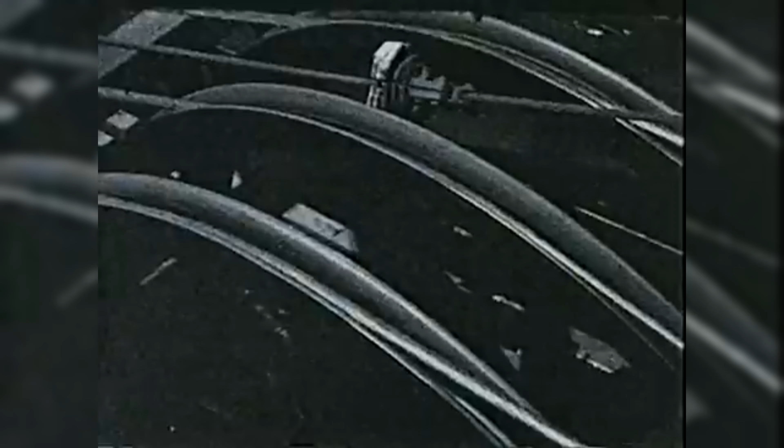While ships went down in the Pacific, while tanks burned in the African desert, while sirens screamed over London, in one American city, in one set of factory buildings, machine after machine rolled off the floor with a precision no war had ever demanded before.

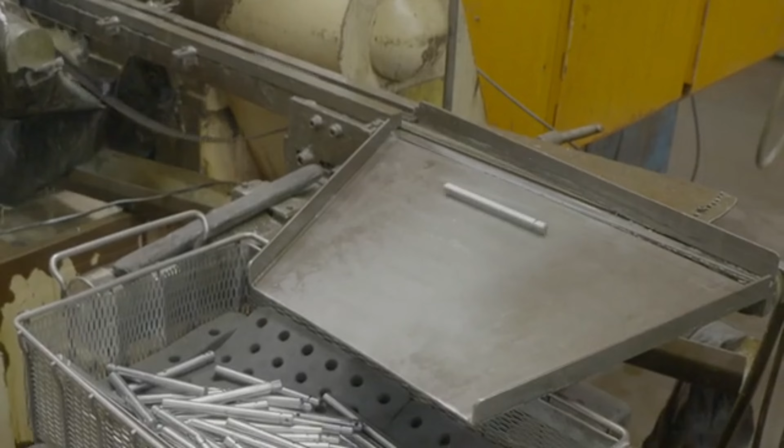In 1942, 1 out of every 12 machine tools manufactured in the United States carried the same name. 1 in 12. Not Ford, not General Electric, a company most Americans had never heard of, in a city whose greatest contribution to the war effort was invisible, ground into pistons, bored into gun barrels, pressed into the bearings that kept a democracy's engines turning.

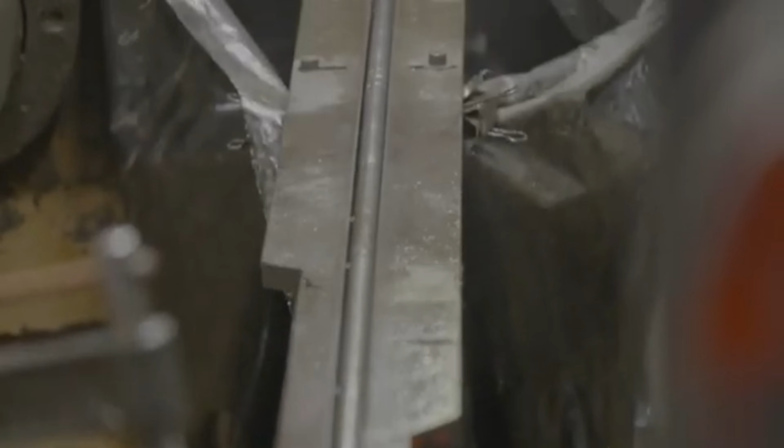What does it mean to win a war with machine tools? What does it mean when one city, one factory, one family decides, not on a battlefield, but in Ohio, the outcome of the greatest conflict in human history? This is the story of Cincinnati grinders. It begins, as so many American industrial stories do, with an inheritance and the right friendship.

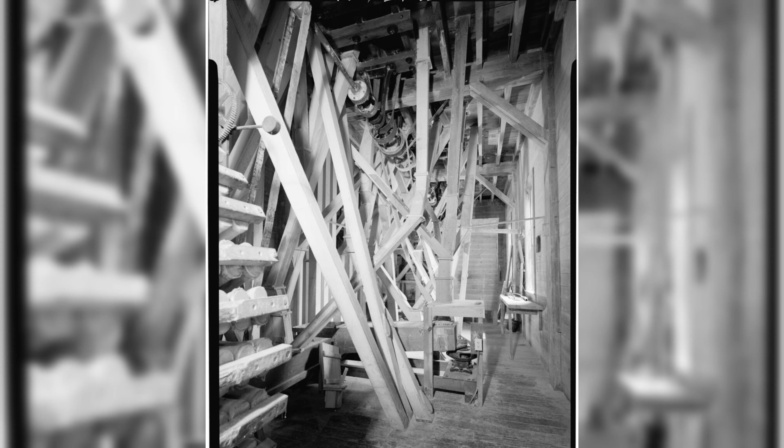In 1874, a young man named George Mueller inherited his father's modest machine shop on Vine Street in Cincinnati, Ohio. The elder Mueller had built a small reputation making parts for sewing machines and repairing whatever anyone brought through the door. George was practical enough to know he couldn't run it alone, and smart enough to ask his friend Fred Holz to join him. Holz was the kind of man who looked at a piece of metal and saw not a material, but a problem to be solved.

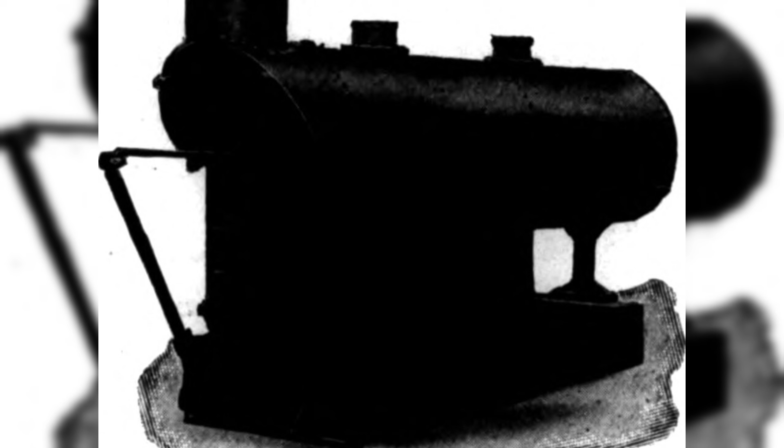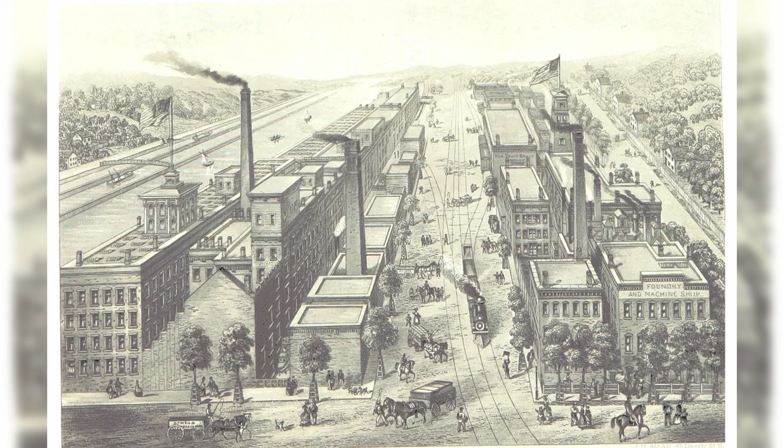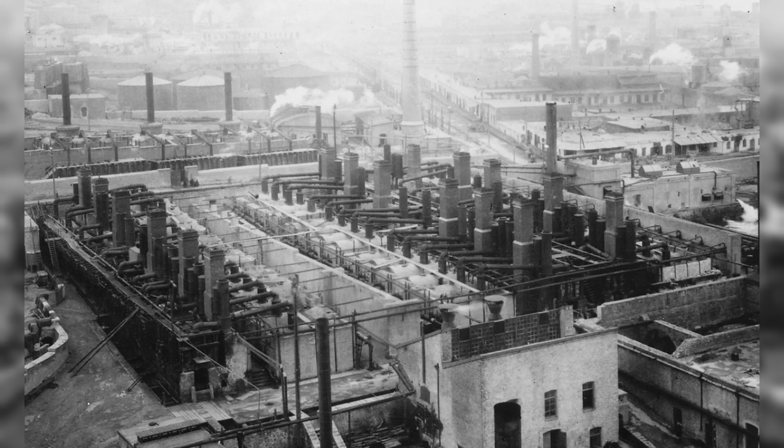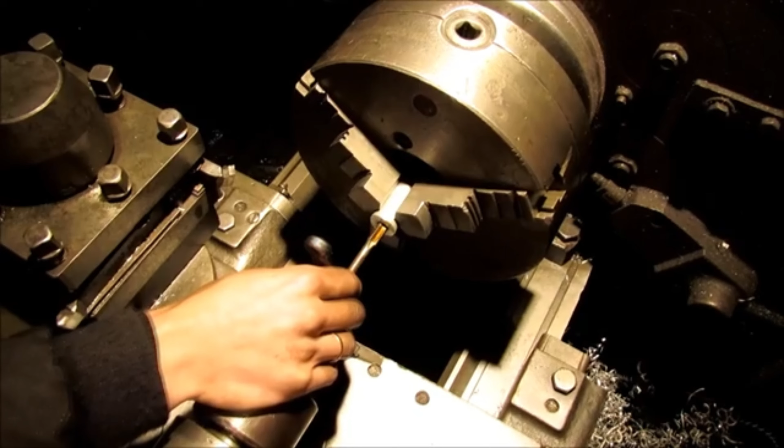For the first few years, they did what the shop had always done: repaired, maintained, turned parts on order. But by 1876, the two men had found their real direction. The expanding American economy needed fasteners, threads, and precision connectors at a scale that hand tools could never supply. Mueller and Holz reorganized around the screw machine and its related tooling, the taps and dies that cut threads into metal. By 1884, their enterprise was formally incorporated as the Cincinnati Screw and Tap Company. Not a glamorous name, but an accurate one.

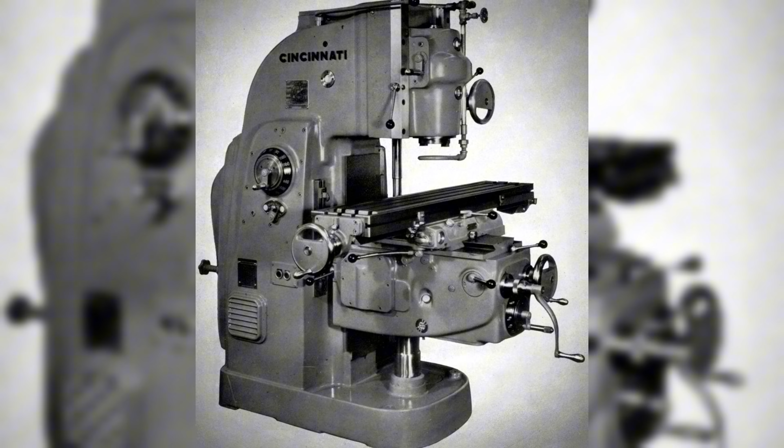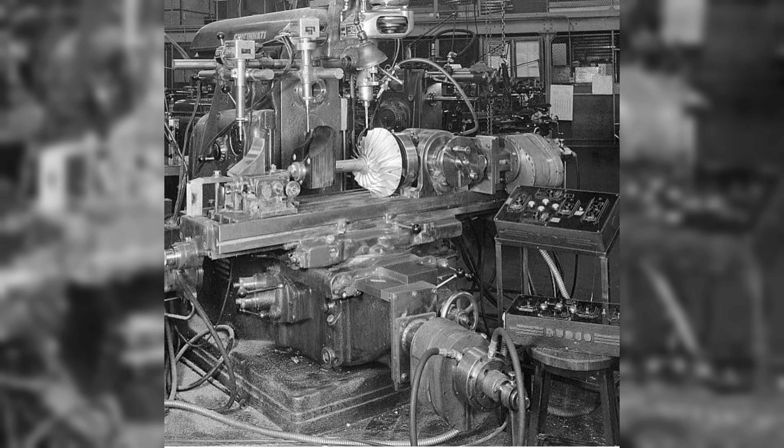The decisive break came in 1889, and it was not an economic decision, but an intellectual one. Fred Holz understood something that most manufacturers of the era did not: that the tools used to make tools were worth more than the tools themselves. In that year, he separated the milling machine work from the screw and tap business entirely, and, together with his financial partner Frederick A. Geier, incorporated the Cincinnati Milling Machine Company.

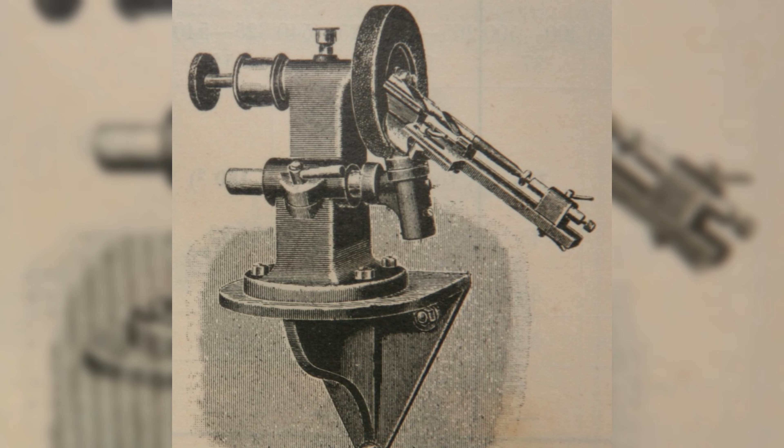In that same year, Holz designed the company's first cutter grinder, a machine that allowed factories to sharpen their own cutting tools in-house rather than buying new ones. The cost savings were immediate and obvious. The first export order, to a Swedish manufacturer, arrived the following year.

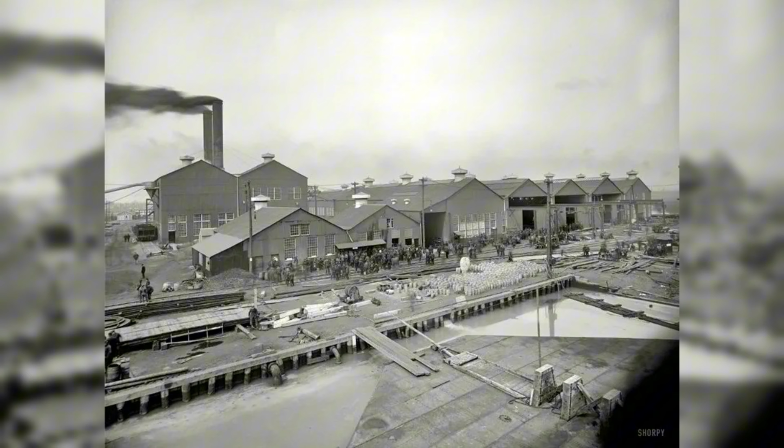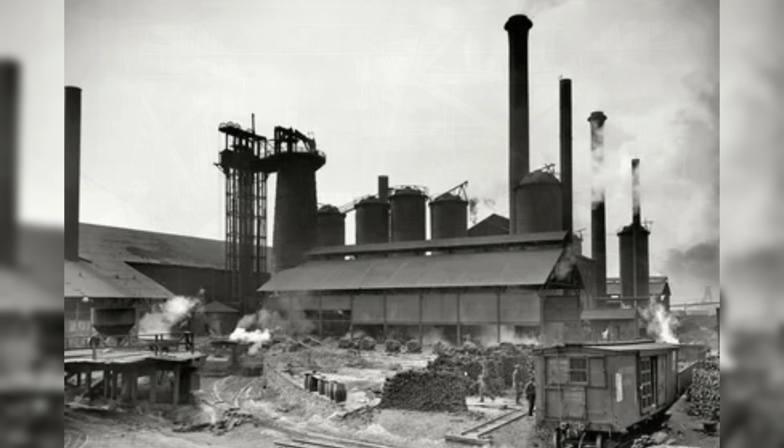Geier, who eventually bought out Holz's stake in 1905, was the organizational mind the company needed. He saw that the machine tool industry's center of gravity was shifting westward, and he was determined to be ahead of it. In 1907, he purchased 102 acres in the Oakley neighborhood east of Cincinnati, a site large enough to build not just a factory, but an industrial colony. By 1911, the new complex was complete: a foundry, a power plant, machining halls with over 6 acres of floor space. At the time, it was described as the world's largest factory devoted exclusively to milling machines.

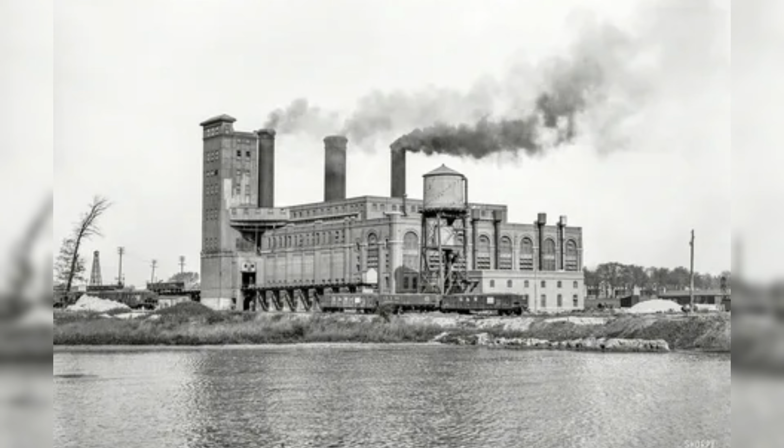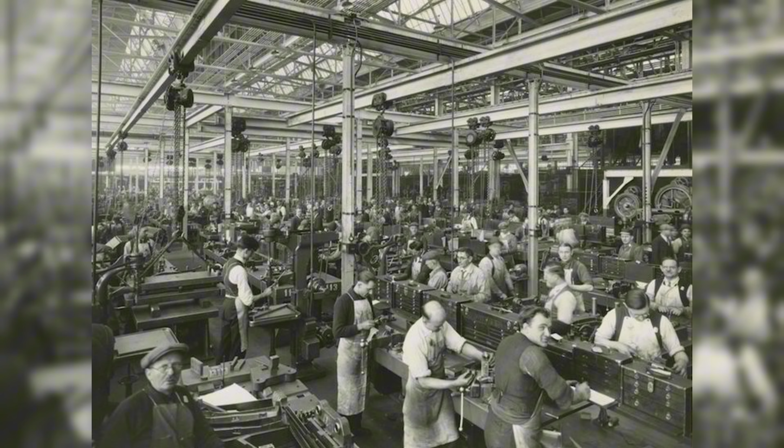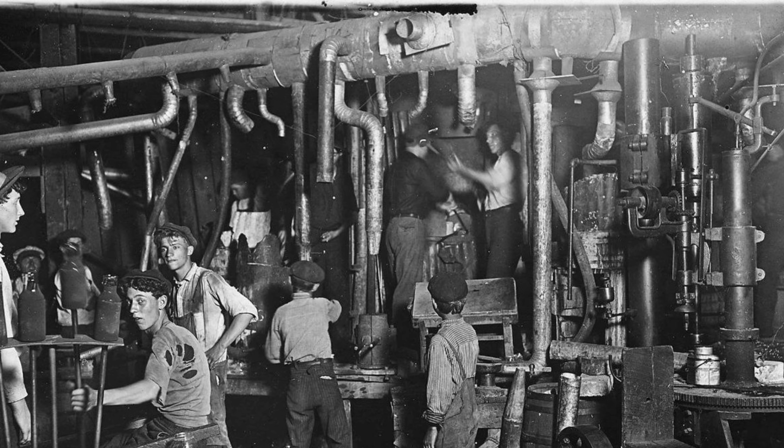Geier's timing was not luck. The automobile had arrived, and America's hunger for precision metal components was about to become insatiable. But the years immediately before the early 1920s brought a reckoning. By 1920, the company had 1,004 workers and 561 unsold machines sitting in inventory. The economic downturn forced brutal decisions. Management salaries were cut, wages reduced by 15%, and the workforce fell to just 250 by 1921.

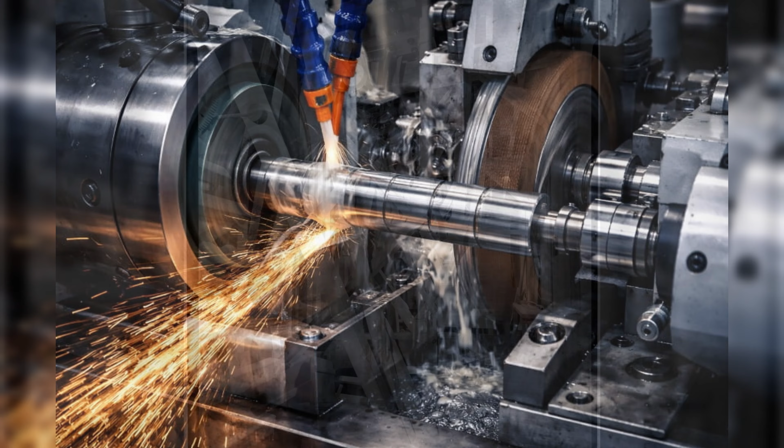It was in the middle of this contraction that a young man named Frederick V. Geier, the founder's son, recently returned from the Western Front, where he had personally fixed production problems on 75mm artillery pieces, walked into the boardroom and proposed something that would change the company's trajectory entirely. He proposed grinding. In September 1921, Cincinnati Milling Machine Company acquired a controlling interest in the Cincinnati Grinder Company.

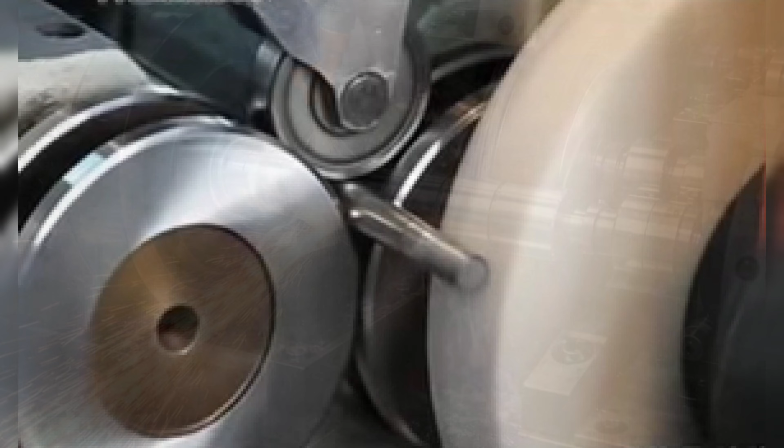The following year, production moved to Oakley. Along with the factory came something far more valuable: the patents on centerless grinding. What is centerless grinding, and why did it turn an entire industry upside down? The answer requires a moment with the physics.

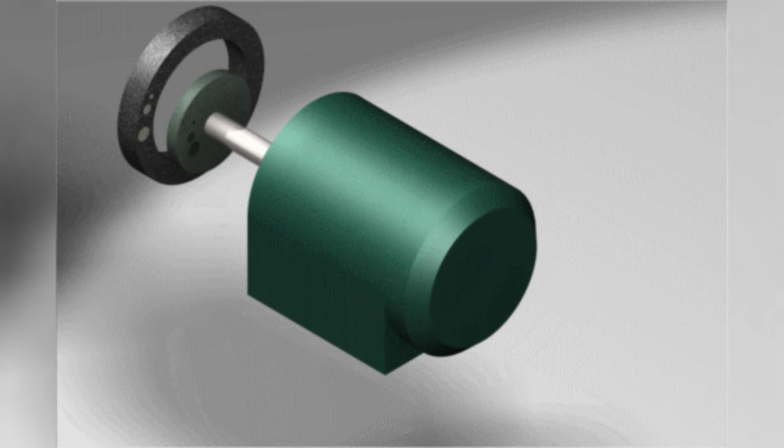In conventional cylindrical grinding, a workpiece, a shaft, a pin, a valve stem, is held between two centers, mounted, ground, removed, and replaced one piece at a time. The process is precise but slow. Every mounting introduces a small chance of error. Every removal costs time. Centerless grinding eliminates the centers entirely.

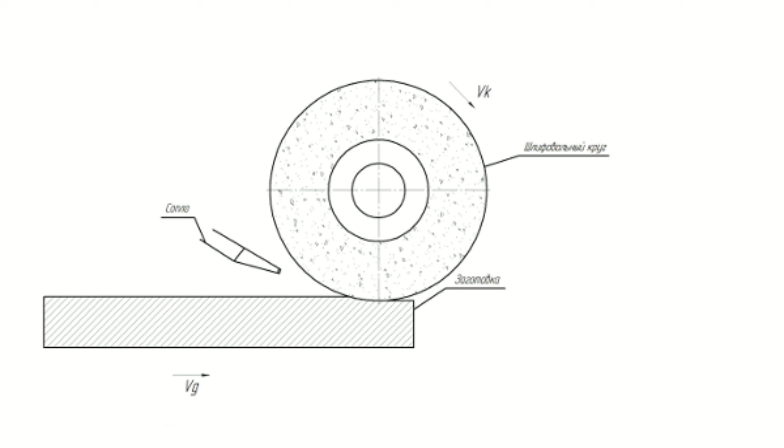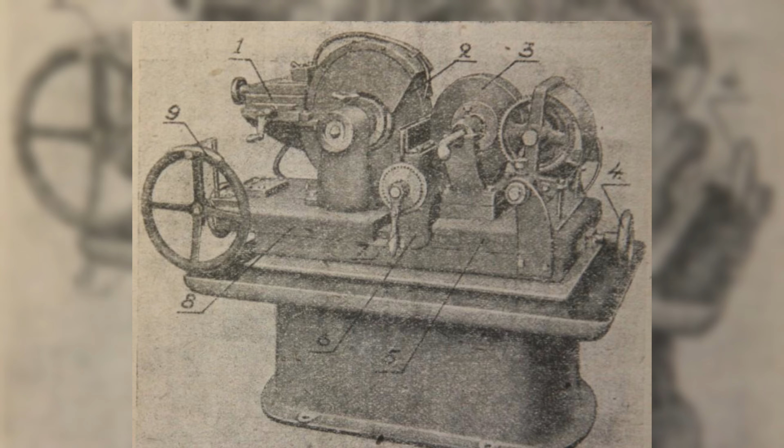The workpiece rests on a support blade between two rotating wheels, a large grinding wheel that removes material, and a smaller regulating wheel that controls the rotation and feed of the part. Tilt the regulating wheel at a slight angle, typically 1 to 3 degrees, and the workpiece feeds itself through the machine continuously, emerging from the other end ground to tolerance. No chucking, no centering, no stopping.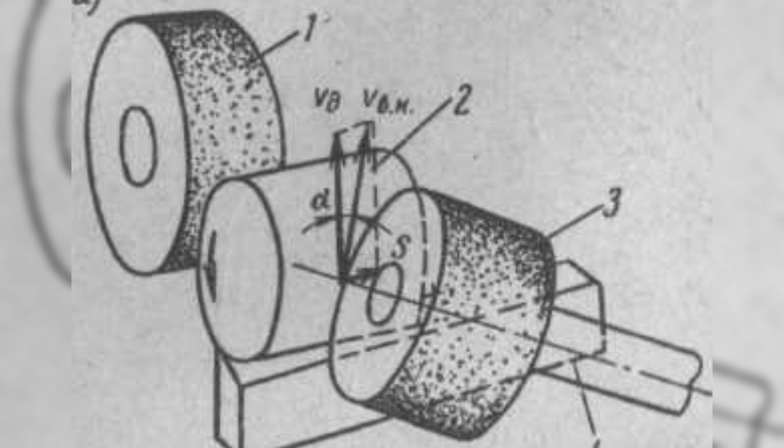A skilled operator could feed parts in a continuous stream. The machine would return them ground to within fractions of a thousandth of an inch. The implications for mass production were staggering. Pistons, valve stems, roller bearings, fuel injector pins, camshaft journals. Any cylindrical component produced in volume could now be ground faster, more consistently, and at lower cost than had ever been possible.

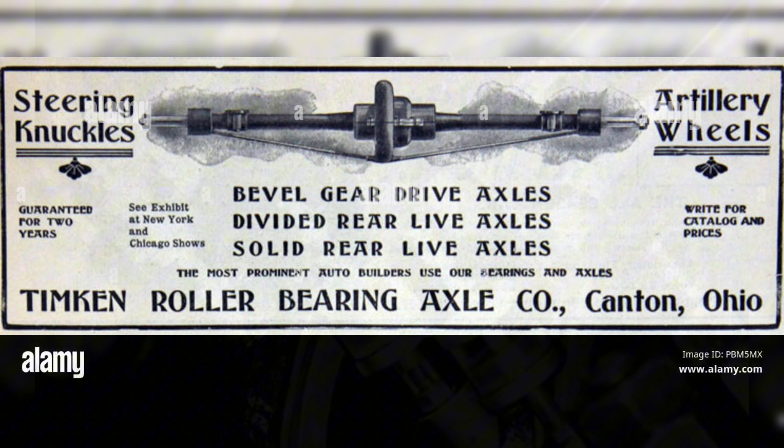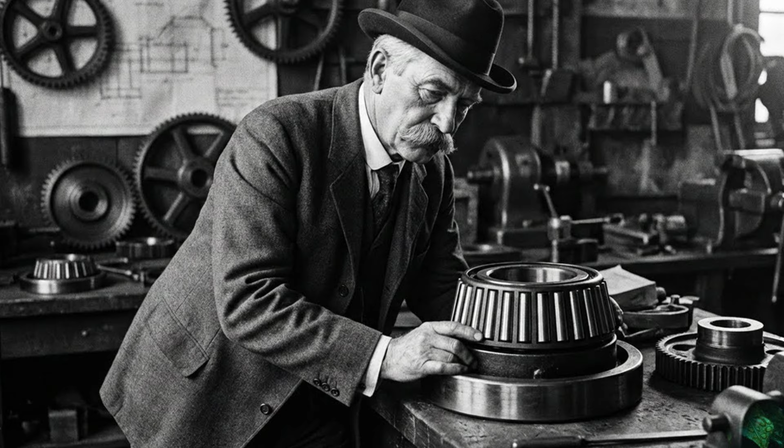The subsidiary, formally organized as Cincinnati Grinders, Inc., its trademark registered with the U.S. Patent Office in October 1929, moved quickly to perfect the technology in partnership with one of America's most demanding customers. That customer was the Timken Company, the Canton, Ohio bearing manufacturer whose roller bearings went into virtually every American automobile, locomotive, and piece of heavy equipment.

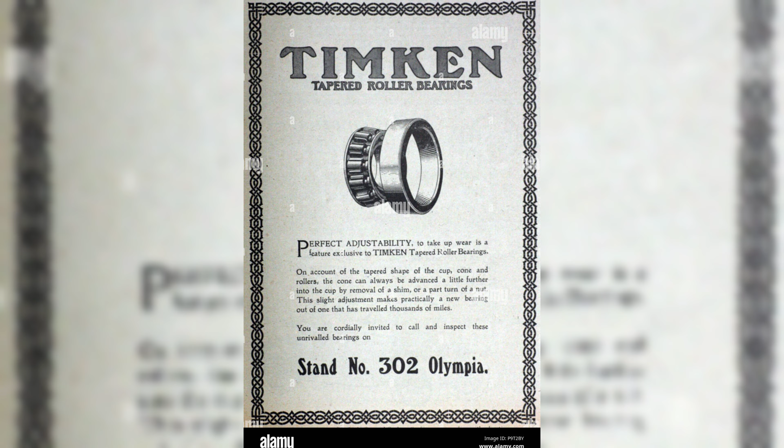Timken needed bearings that were simultaneously cheaper to produce and more precisely ground than anything the previous generation of machinery could deliver. Working with Cincinnati Grinders, they got both. The resulting machines allowed Timken to produce automotive bearings that were lower in cost and higher in precision than their predecessors. The automotive industry took notice immediately. Ford, General Motors, Chrysler, all of them depended on bearings, and all of them depended on the companies that ground them.

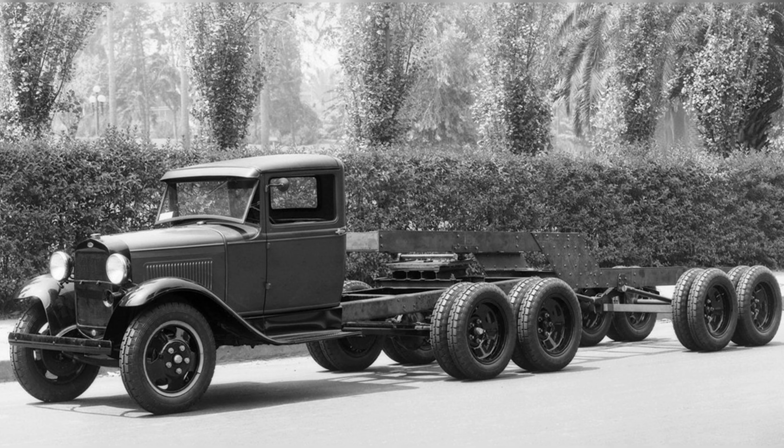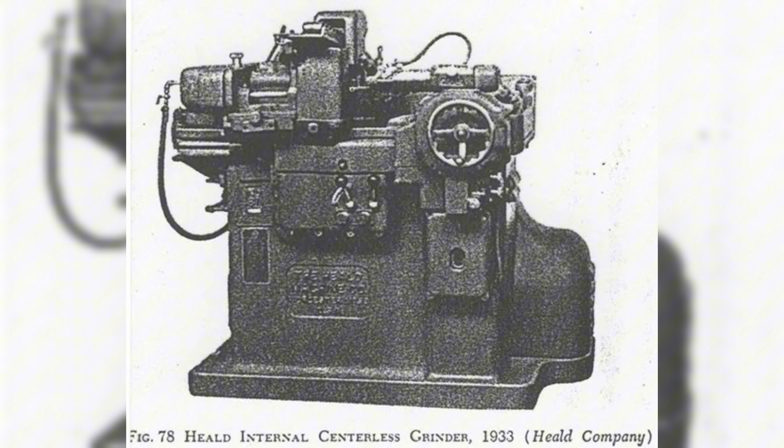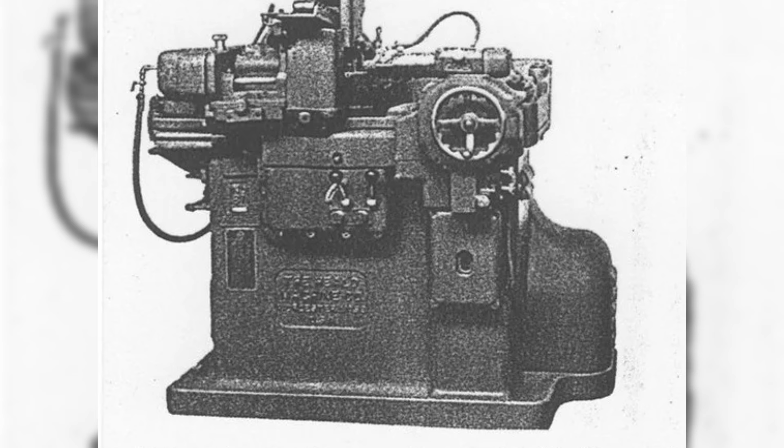By 1926, with the grinding subsidiary fully integrated and the centerless technology spreading across American industry, Cincinnati Milling Machine Company became the largest machine tool company in the United States. It had started 40 years earlier with 2 men in a rented shop fixing sewing machines. Now it set the standard by which every bearing, every piston, every precision shaft in American manufacturing was measured. The question in the years that followed was whether a company built on precision could survive an imprecise world.

December 7, 1941, Pearl Harbor. The question of whether America would enter the war was answered in an afternoon. The question of whether American industry could supply a war was answered over the following 18 months, and Cincinnati was at the center of the answer.

The mill, as employees had always called the Oakley complex, had survived the Great Depression by leaning on export sales. By 1932, exports represented a third of all revenue, up from 1/5 in 1929. The company had endured by selling precision to a world that needed it. Now the world needed it at a scale no peacetime economy had ever contemplated.

Fred Geier, the younger, reported a figure that is still quoted at the National World War II Museum in New Orleans. During the war, the mill produced a new machine tool every 17 minutes. In 1942 alone, 17,511 machines came out of the Oakley plant. 1 in every 12 machine tools manufactured anywhere in the United States that year bore the Cincinnati name.

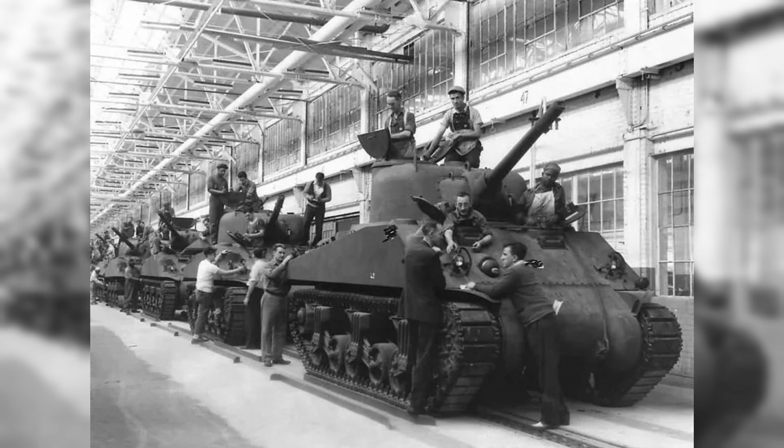To sustain that output, the company assembled a network of 150 subcontractors spread across the eastern third of the nation. 27 outside foundries shipped castings to Oakley around the clock. The workforce, which had stood at just 250 in the depths of the 1921 contraction, climbed to a wartime peak of 8,561 employees. What did those machines make?

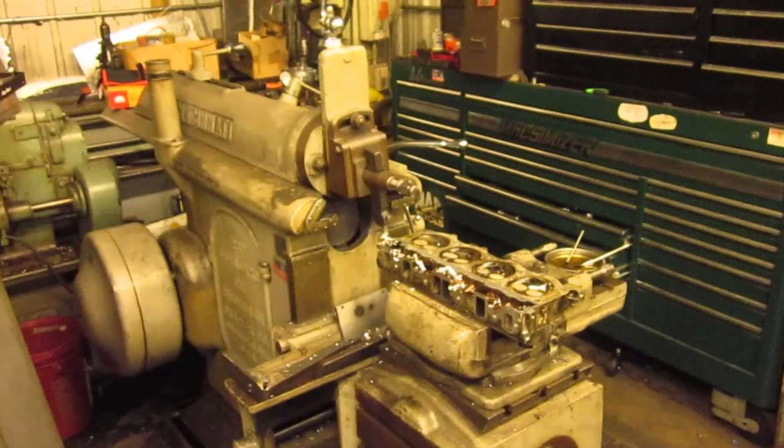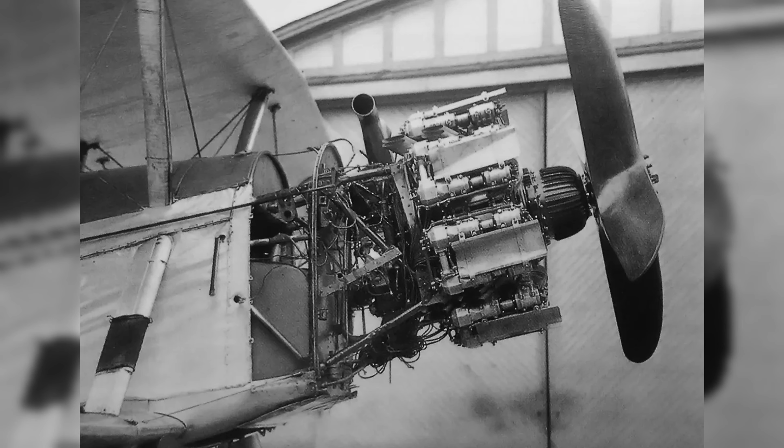Everything a modern mechanized army required. Cincinnati's milling machines cut the fins on aluminum cylinder heads for air-cooled aircraft engines, a problem the mill's own engineers solved when the fins proved too thick for adequate cooling. The grinding machines produced the precision surfaces on artillery components, on naval gun barrels, on the roller bearings that went into every tank, every aircraft, every ship in the Allied inventory.

Late in the war, the Oakley plant itself produced artillery fuse setters, tractor parts, and dies for ammunition manufacturing. The company had ceased to be merely a machine tool builder and had become a direct component of the arsenal.

The lessons of those years went beyond production numbers. The mill learned, at a scale and pace it had never experienced, that precision manufacturing was not a luxury but a strategic asset, that a tolerance of 1/10,000th of an inch on a bearing race could determine whether an engine held together at altitude, whether a gun fired when its crew needed it to. That lesson would shape the company's identity for the next 2 decades.

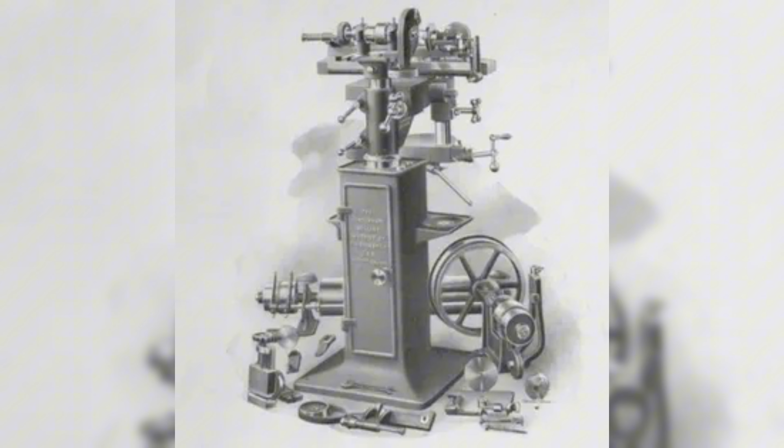The post-war decades were Cincinnati's fullest expression of what a precision machine tool company could be. The automotive industry was consuming bearings, pistons, and valve trains at a pace that made wartime production numbers look modest. New housing meant new appliances. New appliances meant new motors. New motors meant new bearings. The aerospace industry, growing from wartime roots into the jet age, demanded components ground to tolerances measured in millionths of an inch. Every one of those requirements fed demand for the machines that Cincinnati built.

The machines themselves became legendary in the trade. The Cincinnati monoset, a precision tool and cutter grinder introduced in the post-war era, became the standard against which all other tool grinders were measured. The number 2 tool and cutter grinder, with its characteristic green paint and the Cincinnati name cast into the side of the column, appeared in virtually every serious machine shop in the country.

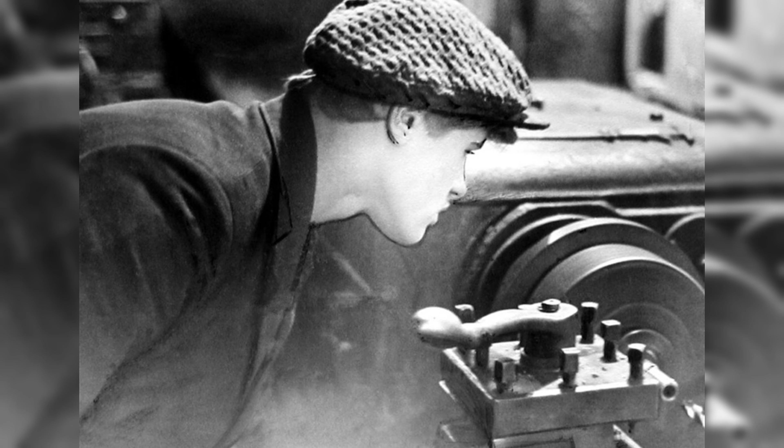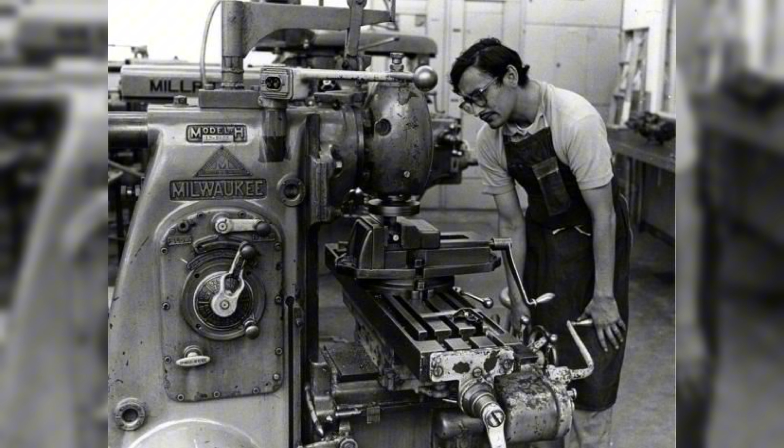Machinists who trained in the 1950s and 1960s learned their trade on Cincinnati equipment. Men who spent entire careers in precision manufacturing remember the feel of those hand wheels and the reliability of those spindle bearings with the kind of specificity that suggests something more than nostalgia.

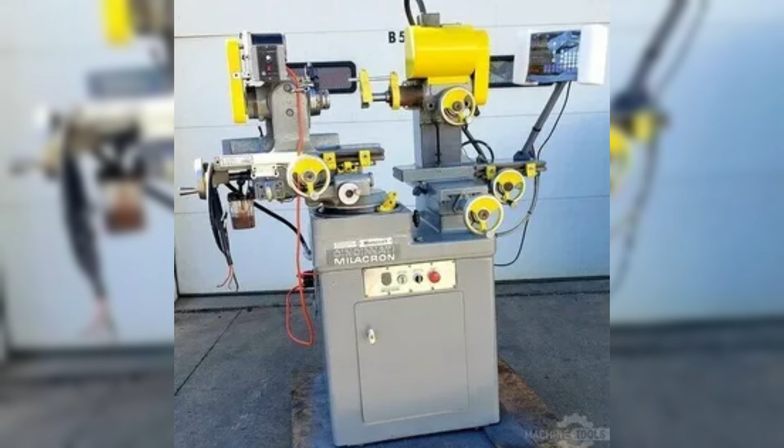On the secondary market in 2024, a number 2 MT tool and cutter grinder in working condition sells for between $2,450 and $9,450, prices that reflect not antique sentimentality but genuine production utility. These machines were built to last, and they have.

From the 1930s through the 1960s, Cincinnati maintained its position as the world's largest machine tool manufacturer. The Oakley complex covered multiple city blocks. Every family in the neighborhood had someone who worked there. The company sponsored Boy Scout troops, donated machine tools to the public high school's metalworking shop, and provided equipment to the continuing education programs at what would later become the University of Cincinnati.

In a city that had built its identity on pork packing and beer brewing, Cincinnati milling had created something new, a culture of precision, a civic identity rooted in the making of things that had to be exactly right. It could not last forever. Nothing in American manufacturing did. The threat came slowly, then all at once.

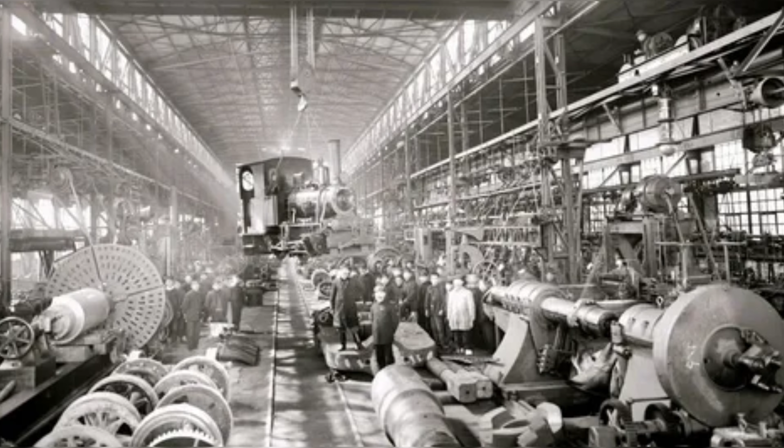Japanese machine tool manufacturers had been rebuilding since 1945, first with American assistance, then with increasing independence. By the late 1960s, companies like Okuma, Mazak, and Mori Seiki were producing machine tools that matched American quality at significantly lower prices. In the 1970s, as the dollar strengthened and American labor costs continued to climb, the price differential became impossible to ignore. Taiwanese manufacturers followed, targeting the mid-market with machines that were good enough for many applications at a fraction of the cost.

The numbers tell the story without mercy. In the early 1960s, American machine tool manufacturers controlled roughly 25% of the global market. By 1978, the U.S. share had fallen to around 20%. By the mid-1980s, it had dropped below 10%. Imports, which had been a negligible factor in 1960, captured nearly half the American machine tool market by 1986.

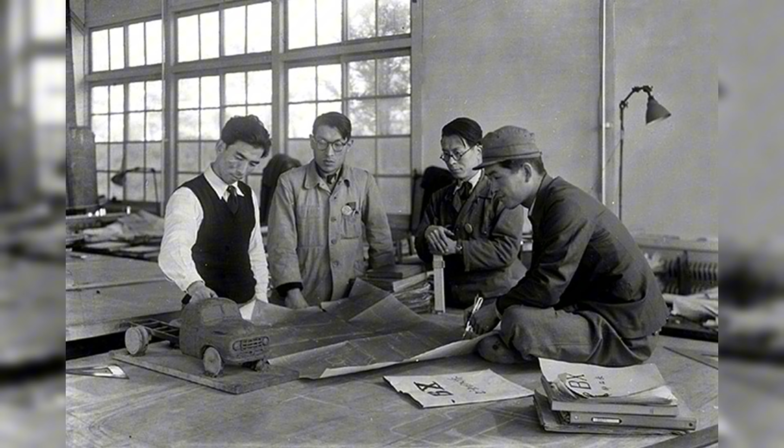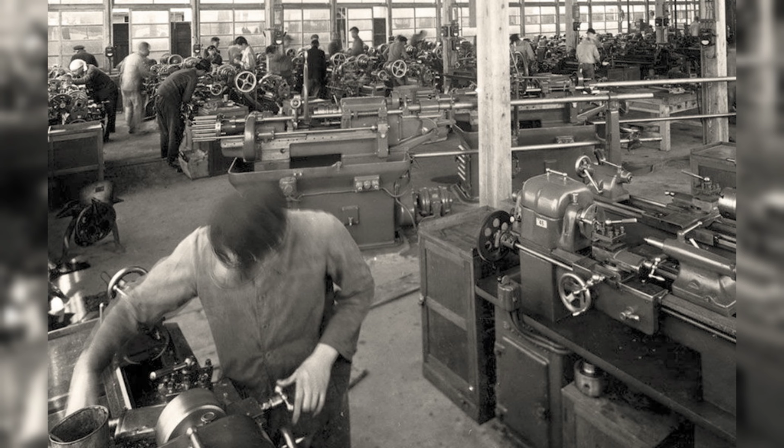Companies that had defined American manufacturing precision for a century found themselves competing on price with manufacturers whose workers earned a fraction of the Ohio wage. Washington noticed, eventually. In 1986, the Reagan administration negotiated a voluntary restraint agreement with Japan, limiting Japanese machine tool imports to specific annual quantities. The agreement was a political gesture as much as an economic policy.

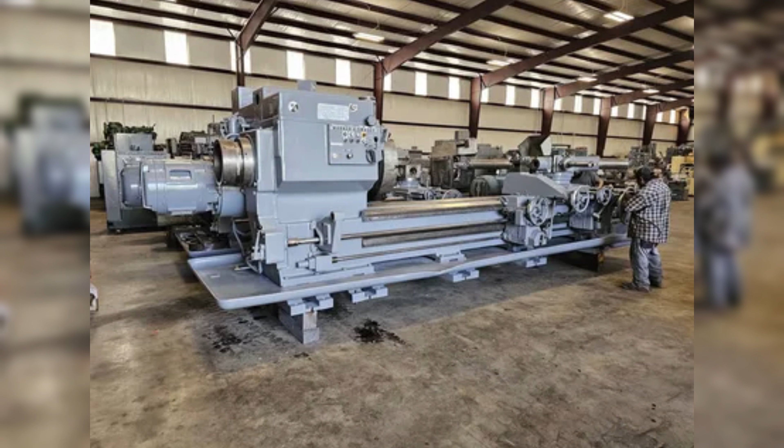It slowed the bleeding without stopping it. Tariffs and quotas could not address the fundamental restructuring of global manufacturing economics that was already underway. The casualties were severe. Kearney and Trecker, the Milwaukee machine tool builder that had been one of Cincinnati's great peers, was absorbed and eventually disappeared. Warner and Swasey, LeBlond, Brown and Sharpe's machine tool operations, the names that had defined American machining for a century, were sold, consolidated, or closed.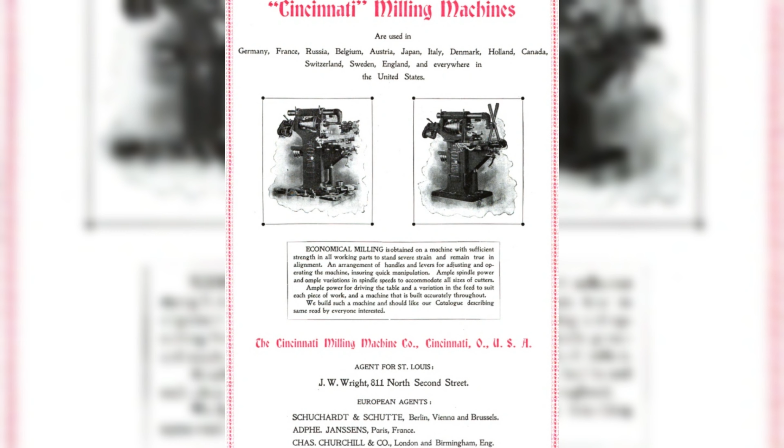Machine tool industry employment in the United States fell by more than 40% between 1980 and 1987. In Cincinnati, the Oakley plant began to look less like an empire and more like a monument to an era that was ending. The question was whether the mill had the will to fight, or whether it would simply wait to be acquired. Cincinnati's response to the competitive crisis began with a symbolic act.

In 1970, the Cincinnati Milling Machine Company reincorporated itself as Cincinnati Milacron, Inc. The name change was not mere marketing. It signaled a deliberate decision to stop defining the company by what it had always made and to define it instead by what precision manufacturing could become. The strategic pivot had two dimensions. The first was rationalization, cutting costs, consolidating facilities, focusing the machine tool business on segments where Cincinnati's engineering depth gave it an advantage over lower-cost competitors.

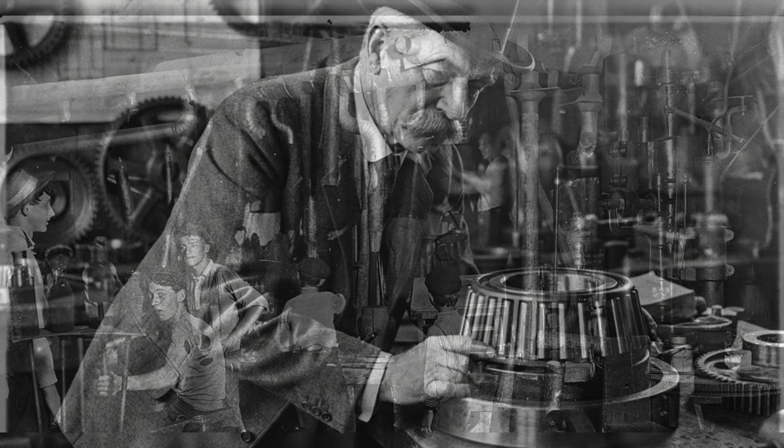In 1993, excess capacity forced the consolidation of machine tool operations. The second, more consequential dimension was diversification into plastics processing equipment, a market adjacent to metalworking in its precision requirements but insulated from the direct price competition of Japanese imports. The internal transformation came through a program called Project Wolfpack, launched in 1986 in the plastics division and later applied across the company. Cross-functional teams, engineers, production workers, salespeople, and accountants working together rather than in sequence were charged with a specific mandate: improve machine quality while removing 40% of the cost and 40% of the components.

According to reporting from the Cincinnati Enquirer in April 1992, the Wolfpack approach fundamentally changed how the company thought about product development. More than 75% of the mill's 1993 machinery sales consisted of products that had not existed 5 years earlier. It worked. After reporting losses in 5 of the 10 years following the peak of the Japanese competitive onslaught, Milacron returned to profitability in 1992. Its plastics machinery plants in Ohio were named among the 10 best plants in America by Industry Week magazine in October 1994. By 1995, nearly half of the company's revenue came from outside the United States.

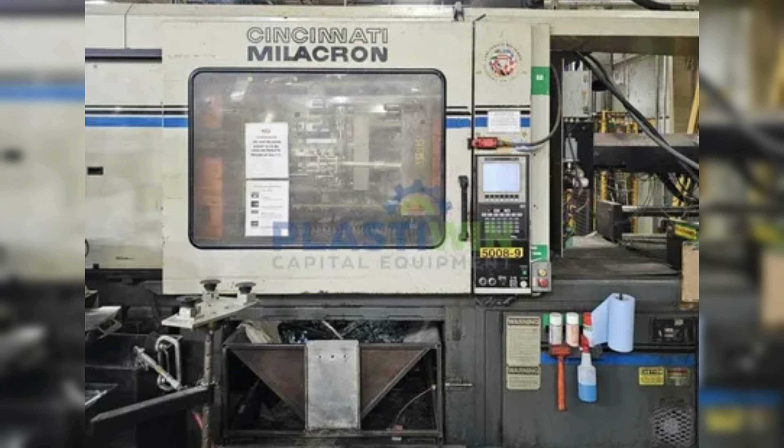What separated Cincinnati Milacron from the machine tool companies that died was not luck. It was the recognition, made painful and early, that the old identity, America's machine tool king, was no longer sufficient. The companies that clung to that identity found it a shroud. The companies that let it go and built something new while preserving what had always been genuine, the engineering culture, the manufacturing precision, the institutional knowledge accumulated over a century, had a chance. Cincinnati had a chance. Whether it used it wisely is a different question.

The decision that effectively ended the Cincinnati Grinders story came in 1998, when Cincinnati Milacron divested its machine tool division entirely and simplified its name to Milacron, Inc. After more than a century of building milling machines, grinding machines, and the precision tools that American industry depended on, the company sold that heritage, sold the Cincinnati name on machine tools, sold the Oakley legacy, sold the institutional knowledge of centerless grinding, and walked away. The buyer was Unova Inc., an industrial holding company. The machine tool assets, including the Cincinnati grinding lines, eventually operated under the name Cincinnati Machine, later drawn into a series of industrial transactions that left the original manufacturing identity fragmented across multiple owners.

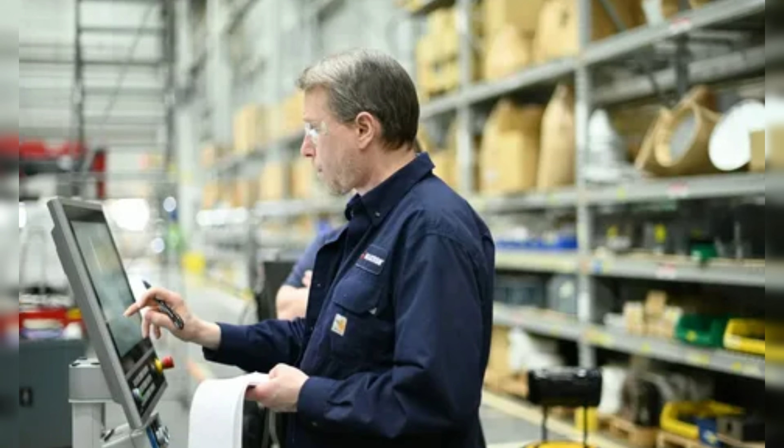The Oakley plant, which had employed 8,561 workers at its wartime peak, fell silent. The building that had been a landmark for generations of Cincinnati families sat empty for years before being demolished, replaced by a multiplex cinema and retail development. The machines that had built the arsenal of democracy were gone. In their place, a parking lot and a movie theater.

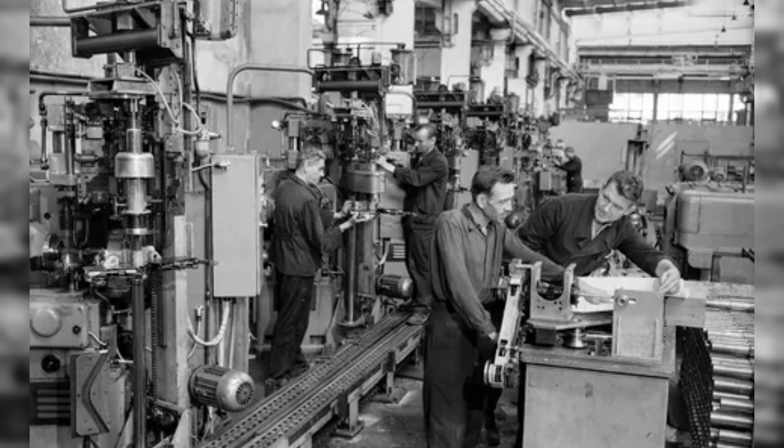Milacron itself, now a pure plastics equipment company, struggled with the weight of the diversification strategy that had once saved it. Acquisitions in the 1990s, Ferromatik in 1993, DME in 1996, had loaded the balance sheet with debt at precisely the moment when the manufacturing economy began to contract.

In March 2009, Milacron Inc. filed for Chapter 11 bankruptcy protection, disclosing liabilities exceeding $500 million. The resolution was characteristic of early 21st century American industrial finance. In May 2009, substantially all of Milacron's assets were sold to a company formed by affiliates of Avenue Capital Group and DDJ Capital Management, which together held approximately 93% of the company's outstanding notes, valued at roughly $175 million. The new investors provided an $80 million loan, of which $40 million went directly to Milacron as operating capital.

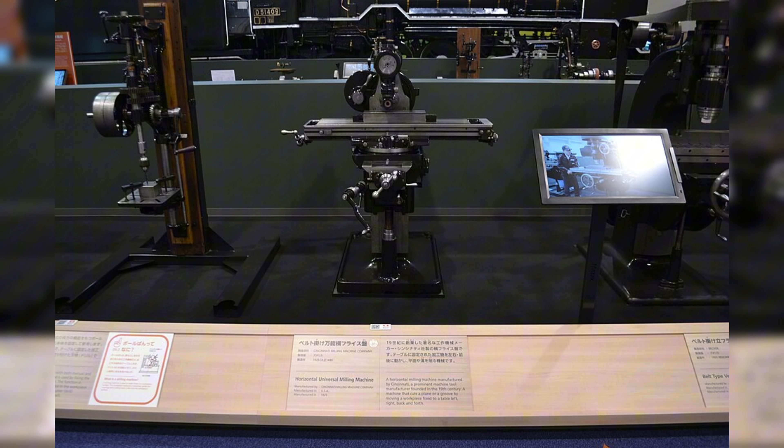A $55 million revolving credit facility was secured through General Electric Capital Corp. The restructured Milacron LLC emerged from bankruptcy with liabilities reduced by more than $500 million, roughly 80% of what it had owed. A decade later, in November 2019, Hillenbrand Inc. acquired Milacron. In February 2025, Bain Capital purchased a 51% stake.

The Cincinnati Milling Machine Company, founded by two men in a rented shop on Vine Street in 1874, built into the world's largest machine tool manufacturer by Frederick A. Geier, guided through a world war at one machine every 17 minutes by Frederick V. Geier, is now a plastics equipment subsidiary of a diversified industrial holding company, partially owned by a private equity firm headquartered in Boston. Is that a failure? Or is it simply what survival looks like in an economy that no longer values what the mill was built to do?

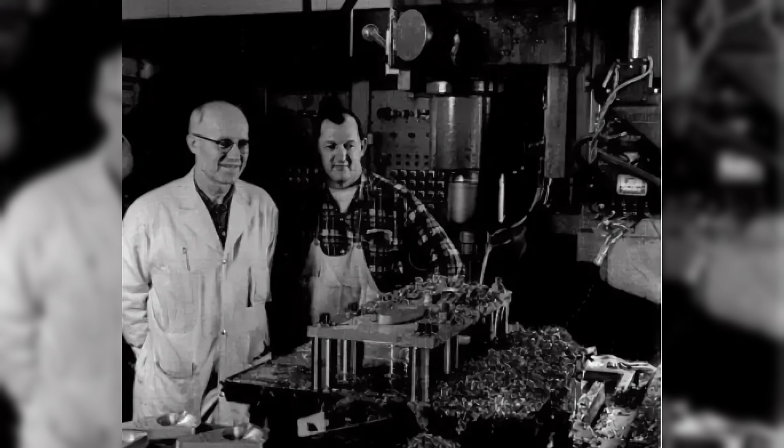The Cincinnati name did not disappear entirely. It persisted in the secondary market for used machine tools, in the hands of rebuilders and repair specialists, in the machine shops where a 40-year-old Cincinnati centerless grinder still holds tolerance on a production run because it was built to last longer than the economy that made it. Cincinnati Service and Rebuilders, Inc. operates today out of the region, staffed by technicians with decades of experience on the Cincinnati and Gold Crown OD grinding product lines. They repair, rebuild, and upgrade the controls and drives on machines that were manufactured when the Oakley plant was still running. There is a market for this work. There will be a market for this work for as long as the machines exist and the knowledge to service them survives.

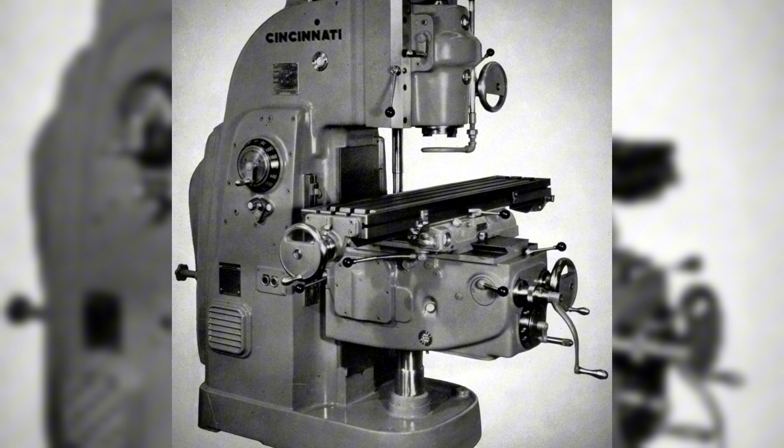The brand is carried forward, in modified form, by Total Grinding Solutions of Warren, Michigan, which builds and sells Cincinnati-branded centerless grinders globally, machines designed around the legacy platform, updated with current CNC controls and automation systems. The name means something in the industry. It means a standard of precision and a depth of application knowledge accumulated over more than a century, and that does not simply evaporate when a corporate structure changes. In some machine shops today, an older machinist will refer to a grinding specification simply as Cincinnati tolerances, meaning the tightest, the most demanding, the kind that required the best machine and the most skilled hands. That is a legacy. It is not a business plan, but it is something.

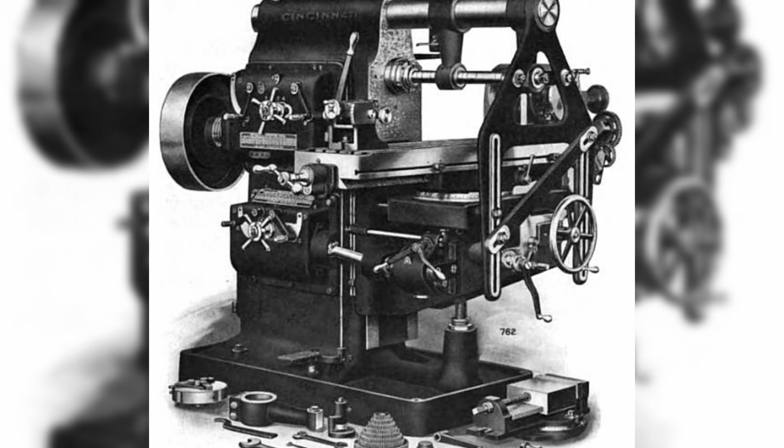One machine every 17 minutes. We return to that number because it refuses to be abstract. 17 minutes is the time it takes to drive across Cincinnati. It is roughly the length of a meal break. It is long enough to make a decision that changes everything and short enough that the pressure never lets up. In 1942, the men and women of the Oakley plant made that number real. Not once, not as a record to be celebrated, but as a daily, grinding, unrelenting act of industrial will.

They did it because the world required it, because the machines they built were the tools that built the tools that won the war. They did it because that is what precision manufacturing demands. Not inspiration, but discipline. Not genius, but consistency. Not the dramatic gesture, but the correct tolerance, held every time in every part without exception. The factory is gone. The company exists in a different form, under different ownership, making different things.

But the standard survives. In every machinist who learned on a Cincinnati grinder, in every bearing that rolls smooth because someone upstream held the tolerance, in every machine shop where the green paint on an old column still means the work will be right. If you work in manufacturing, or if you know someone who does, tell them this story. The machines that made the modern world were not made by accident. They were made in Ohio by people who understood that precision is not a detail, it is the point.